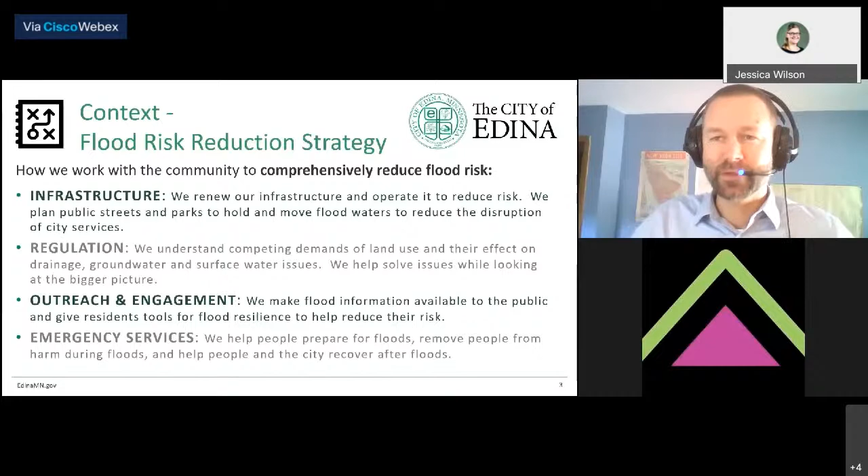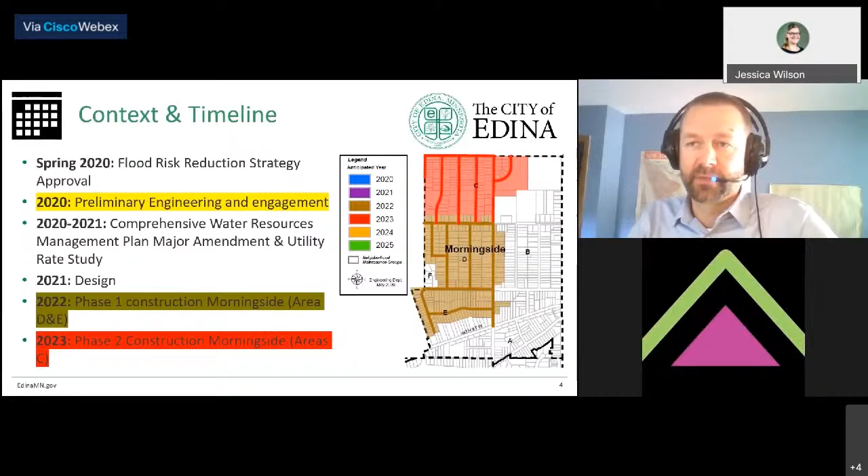This is the timeline that we've shared on the Better Together site. A lot of that conversation is happening there, and we're inviting you to come out and test the options that we're looking at, test all the components to the options. Tell us where you see opportunities, where you see risk, and what trade-offs you're willing to make in the community. This is that joint decision.

We're focusing right now on that fall 2020. We just gave a project update to the city council, and now we're bringing out some of these concepts to the public. This will inform our design work going forward, and it will help us narrow in on a project recommendation.

So if you haven't, make sure you're taking a look at that Better Together site. A lot of the conversation and the things that we're going to be telling you about tonight are really going to be expanded in more detail, and the conversation will be ongoing for the next several months.

And Ross, if I can just jump in for a second, I would encourage everyone. I know we're streaming right now on the site, so you should be there now. If you're on YouTube, then please feel free to visit. But it's a great place where we're putting all of the information, all of the work that we've done to date lives here. It's a great way to get in touch with the project team, so specifically who's working on it, and they'll get back to you, especially if you have a question about your specific property. There's also some videos, some surveys, some really good ways to engage with the project and connect with the people doing the work. So bookmark that.

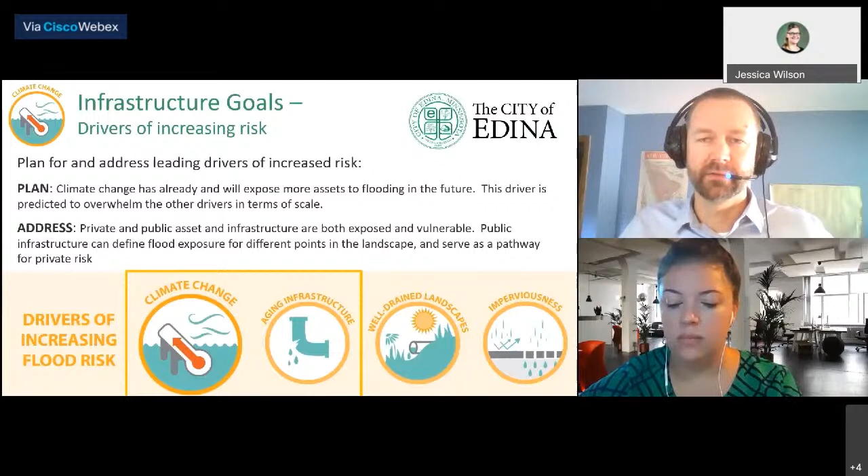During our task force, we saw there were three key ways that a structure is susceptible to flood risk. And the one that we've been focusing on for a long time is surface water flooding. We've had maps now for half a dozen years that show where the flood risk is in the neighborhood. But then we got a little bit more in detail. We know now that our sanitary sewer system can serve as a conduit between properties and between the public system. If that system is overwhelmed, or if a neighboring house floods, the potential for backflow to a nearby house goes up.

The other one that we've seen in the recent time is groundwater. Long-term climate trends and wet years on wet years can really raise the groundwater elevation to something that we haven't seen before. And an individual property's ability to withstand that rising water is important as well. We know that our public project is primarily focused on that surface water component, but we're also going to be including some of the improvements on the sanitary system to help as well. Groundwater, we don't see a feasible way to manage, and that's generally going to be the responsibility of individual homeowners.

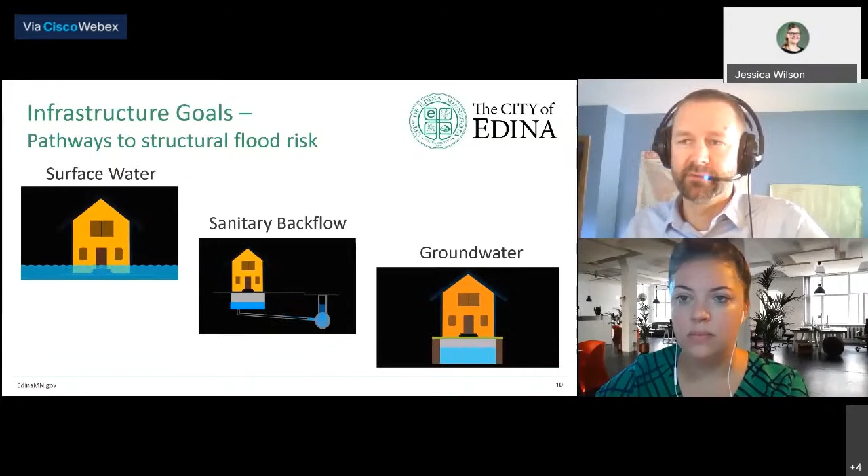So let's dig into the opportunity and the risk key issue areas. We've done a lot to model this neighborhood and to understand where the water pools and where the water flows. We've used a lot of new information, and we've actually taken neighborhood-specific flow monitoring to calibrate our models. And we've created a 2D model which can show the flow in a dynamic way. And while the maps I'm going to show tonight are static maps, we also have videos posted, and I'll give you a link to that so that you can see the dynamic model runs to really visualize how the flow times over the course of an event.

We like to say that this is the best neighborhood scale flood map in the state. We're really proud of it. We're excited for the opportunities it gives us to understand the problem and to engineer ways that we can mitigate and transfer those risks.

But it's still using assumptions for individual lots. So while we're showing individual lots and homes, and we feel it's good at that neighborhood scale, your lot could be off by a matter of feet. And where we don't show a risk, you might have one. Or where we show a risk on your property, it might not exist. If we get more specific information in the future, we can improve that lot by lot scale.

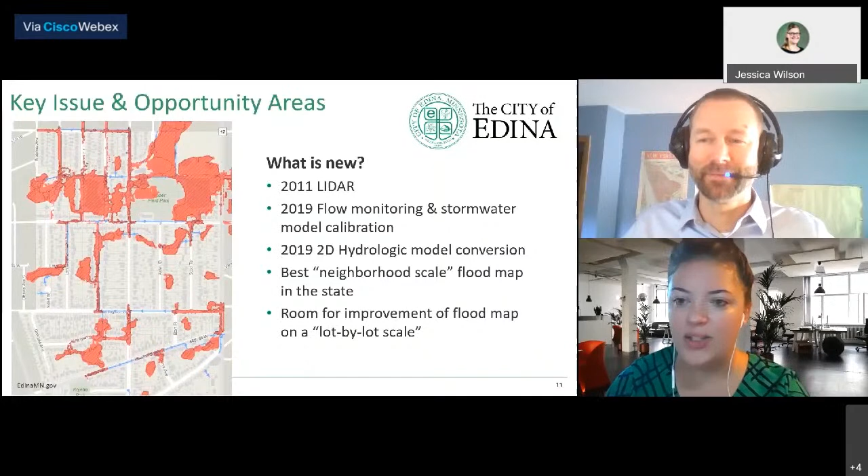Yeah, thanks. So we've learned a lot about what's possible here. The extent of the surface overflows, we were blind to those issues in the past. So this is new for us. We have a deep appreciation of the scale and interconnectedness of the problem. We know that we can try to really squeeze down on one area, but then the balloon pops up in another. We're getting a good feel for the interrelatedness of this issue across the neighborhood.

Being high means being dry. There's no substitute for that elevation, and in a low area, the opportunity for creating new areas for storage to reduce flood exposure to homes is really narrow. And sometimes the pipe systems can carry some, but they are limited because of their flat grades and because of just the physical space we have to work with. And the value of those overland overflows is high.

So as we orient you to some of these issues, we're going to work our way upstream. We're going to start in Weber Park. Then we're going to go to the low areas between Monterey and Grimes. We're going to look at some of the steep flow paths on Crocker, Grimes, and then up into some landlocked areas on Branson. Now there's areas outside of these specific areas that also have flood risk.

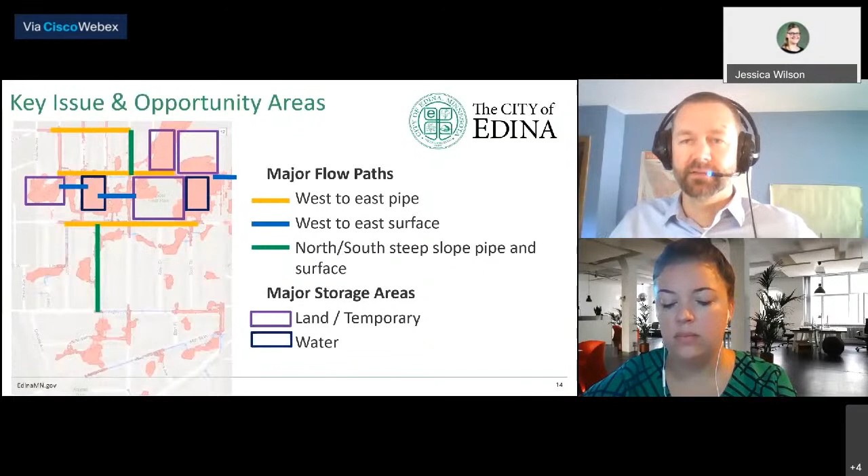We've got some major west to east pipes and surface conveyances. We've got some steep north-south flow paths based on the topography out there. We've got some existing storage in water and existing storage on land. So we're going to step through some of these areas downstream to upstream now.

The flood risk that we see in Weber along 42nd Street and along France Avenue, where Weber Pond is essentially spilling over its banks and into private property. Avail Academy has some flood risk because it's down in the low area. And some of the areas south of 40th Street essentially see overflow through our pipe systems from Weber Pond. Weber Park itself, near the skating rinks and the structure, sees flooding, and we see surface overflows actually flow through Avail from Grimes Avenue east to Weber Pond.

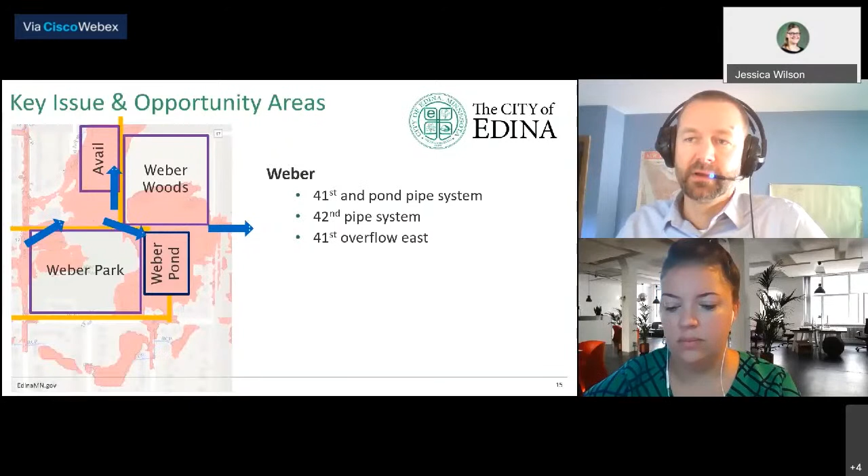And this is our 100-year event, and this is a very significant event. This isn't something that we see on a frequent basis, but this is maybe something that we would have seen during the 87 storm event, depending on what land use was there at the time. Ross, when you mentioned a 100-year event, what kind of rain totals are you talking about, and what time period? Yeah, we're talking about a 24-hour event that's about 7.5 inches of rain over that 24 hours. It comes really intense during the peak, 5 minutes or 30 minutes, but over the course of the day, it

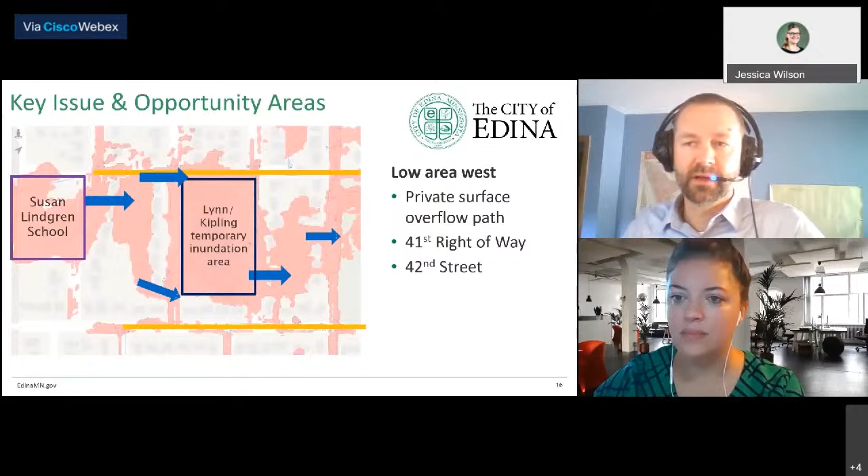where water would either pool or flow so deeply in the street that it could jump over a driveway, or it could jump over a low area and down into private property. So this is something that we definitely want to understand so that we can address it when we're designing those streets for flow.

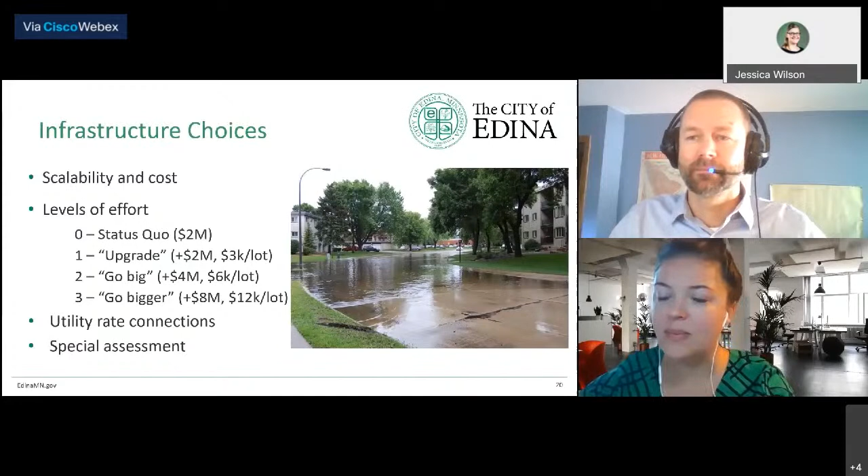So now, as we step through these infrastructure choices, we're going to look at it on a component by component basis, and then we'll show you what we put together for the combined option.

Focusing on the individual strategy, we've got storage and then flow paths. So storage is where the water can pool, and the idea is to make those bigger to find more room so that we can lower the flood elevations in those storage areas. The flow paths, we talked about some of the surface overflows already, but the pipes underground as well. We look at making those larger so that they can convey more water.

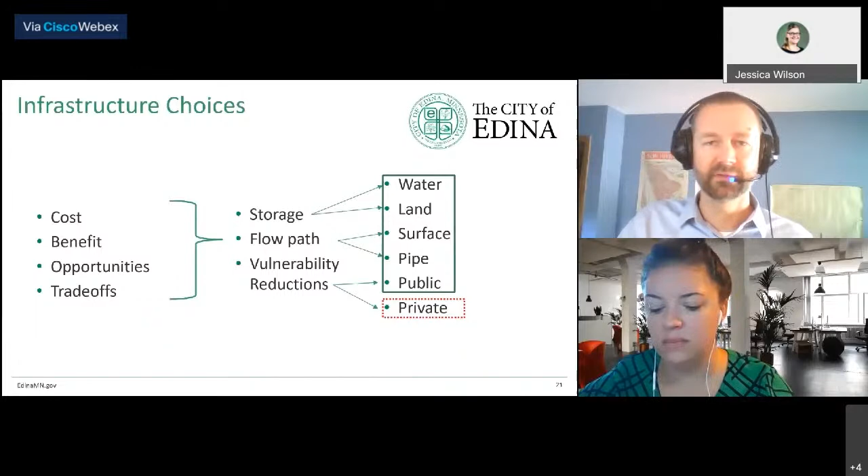And then the individual vulnerability reductions. What can we do when we can't engineer the water to go lower? How do we make sure that the structures and infrastructure systems can actually stand up to the flow or the amount of water or holding water? So for storage, we're going to be looking at land, existing water and land options. For flow paths, we're looking at pipes and surface flows. And then for vulnerability reductions, both public systems and private systems. And we'll talk a little bit about some of the costs, benefits, opportunities, and trade-offs of each.

So starting with existing water options. We have existing opportunities at Weber Park, at Weber Pond, and at the Lynn and Kipling inundation area. The idea here is we tested it in our model. Can we make those bigger? Can we expand them? And the figure on the right shows some of the options that we can work through when we have existing water. So expanding a pond, potentially lowering the outlet elevation so that it holds more water further down in the landscape. Maybe even predictively pumping it out before an event to make room for floodwaters.

Or if we can't hold it below the elevation of homes, can we intercept it and create some sort of a flood wall? So generally, the in-water options have low relative costs, but pretty high for flood walls. We see good flood benefit for these options, but the trade-offs are significant. It includes the loss of land if you have a park nearby, if you have existing trees on the area, and if you're behind one of those walls, you can lose the view. Opportunities, you could see improved habitats, or it could be part of a greater park development.

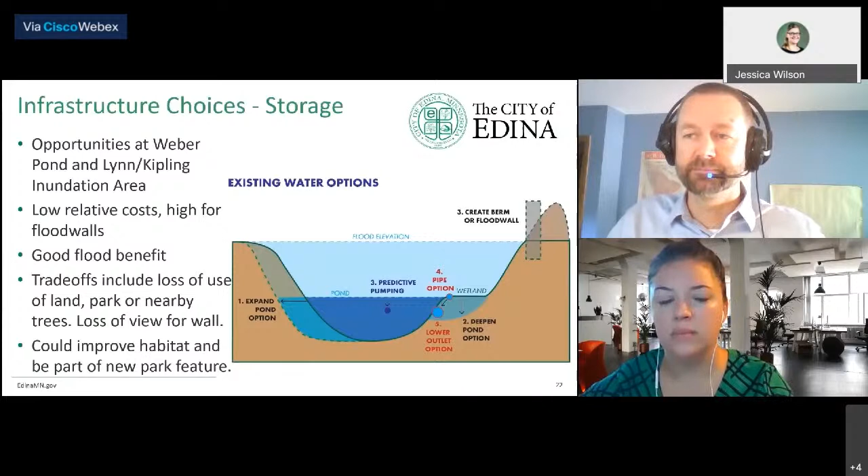We have some examples of what the flood walls might look like. And we figure we're going to have to show better what this would actually look like. So this is going to be part of the design team's mission over the next month, is to give you examples of what this might look like. Flood walls being one, but then, where would we put the water? What would it look like? I mean, we know what ponds look like, but what can they look like in their revised configuration?

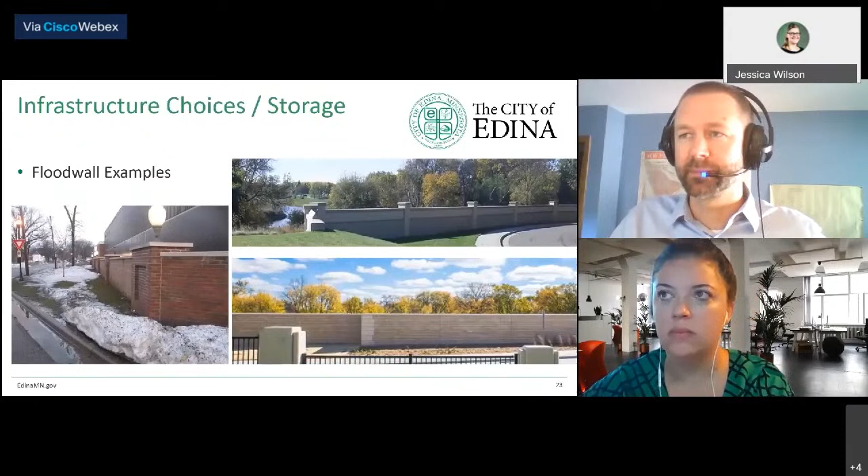Now we'll move on to land storage. We know we have opportunities here at Weber Park, the new Weber Woods, and then Susan Lindgren School and Avail Academy both have land area in these lowers. Generally, our options here on the figure that we show is, if you have some existing storage on land, you can lower that land and expand the area for storage, or you could just wholesale create a pond to get down to that water elevation and provide the most storage. The flood wall example we won't go over again, but that's an option in these land areas as well.

The costs are medium relative to the grading, and again, the costs are high for flood walls. Here we see another good flood benefit. These are some of our best opportunities for storing flood water. But again, they come with significant trade-offs. You lock up that land, you have potentially trade-offs to the existing uses like the sports fields, and it's going to limit the use of that land. You can't put a structure there in the future. It's going to be harder to reconfigure it if you have a dream for a different use.

So Russ, here's an example. Oh, okay. When you're talking about building a pond, and I know there's a lot of design work and specifics to be sorted, so these are just sort of high-level concepts. Would that be something that would exist all the time and then would just fill up more during a flooding event? Or would it be kind of a hole in the ground that fills up when it rains?

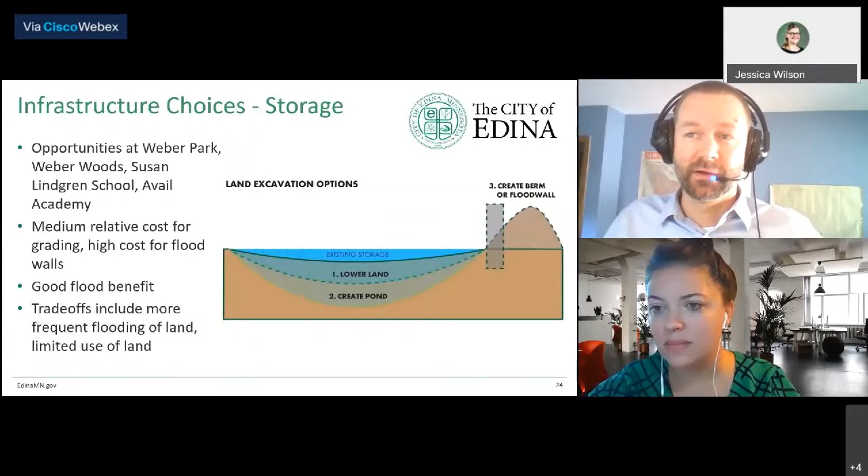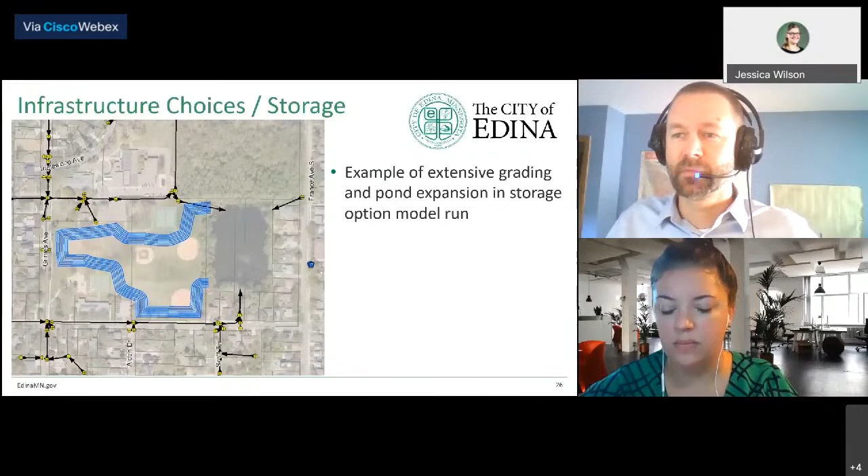Neighborhood wide, we expand that up into Weber Woods, significantly deepening the Lynn and Kipling inundation area, and even making some use on the Susan Lindgren site.

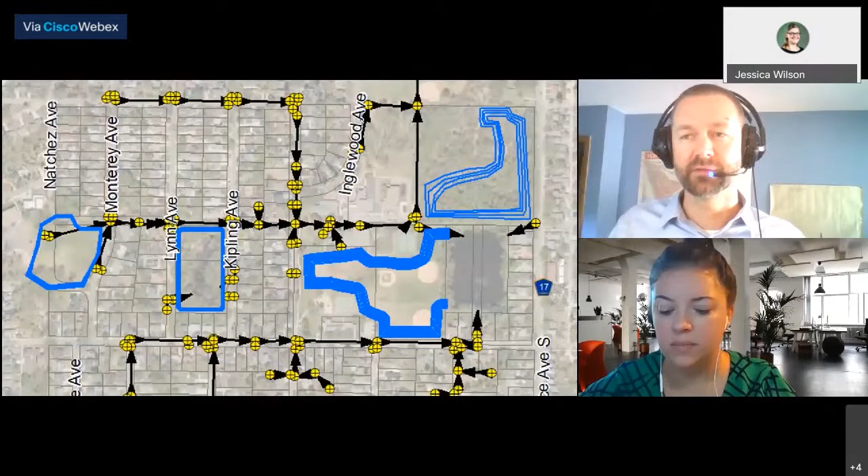Now we'll pivot again to the underground storage. So this is something that we have very limited use of in our model or in our combined option, but this is an alternative to some of those land lowering activities, and this is storage. So here we have another kind of cross-section cut that shows a park area, and then some sort of an underground pipe system that would be able to store water underground.

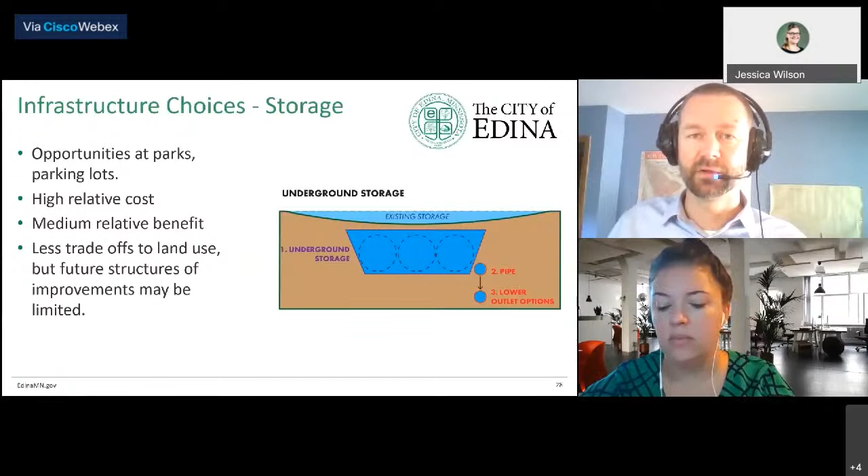The opportunity is at parks or parking lots. It has a very high relative cost and a medium relative benefit. You can't store quite as much under there because of the structures you need to put. The trade-offs mean you're still locking up that land, but you could still have relatively unimpacted active play on the surface. Here's an example from one of the firms that creates these precast structures, and then an installation of those.

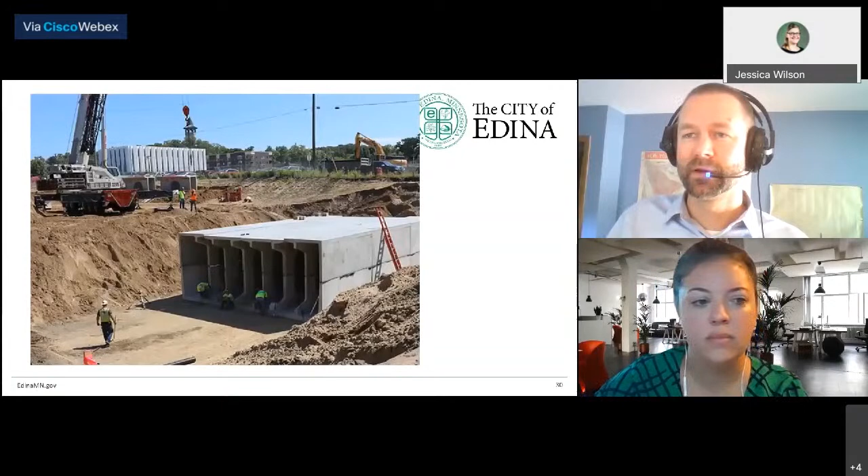And an example from Minneapolis' Prospect Park neighborhood, where they have underground storage and an above ground park where water can first fill up some land area and then cascade down into the underground structures. So this isn't in Prospect Park where this is built. The main idea is to hold the water underground, but it can rise above into this kind of rain garden-y park area. Yeah, here I think they split the difference in a little bit different way. They first put the water above ground to make it a feature, and then they start cascading it down, but it could be the opposite.

This is how two of those options might work together. Then it's a combination solution, or not a solution, but a way to move some of the water around. All right. And again, this is the design team's challenge, is to show what this might look like in our specific area. Right now, in our models we just start carving it up, but we don't have a good sense for the trade-offs and how it actually looks. But we'll get there.

Stormwater infrastructure. So this is the storage and flow paths. So we know that we can pool water on streets. The existing pipe system can be made bigger to carry more water. The benefits are good for transferring risk downstream. In some of our options, this can solve issues or really reduce flood risks and flood exposure in the upstream areas, but it comes at the cost of trading those risks and putting them downstream.

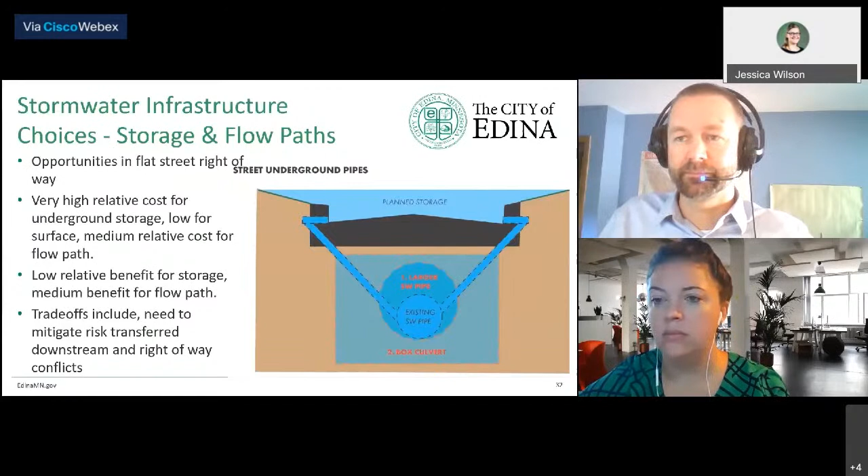A couple examples of what that looks like from our 58th Street project that's ongoing right now. On the left side, we've got some planned surface storage in streets, where during a big event, it pools there for a period of several hours, and then underground storage and infiltration on the right. There's not a lot of trade-offs to be made on the right, but those things come at a premium cost. So you get a lot less of it for your dollar.

Now on the flow paths, when we see those steep street areas, just like we can plan these areas for storage, we also have to plan them for flow. This isn't something that we've really done actively in our past projects, but we understand from seeing those new models and risks that it's something we're going to have to be planning for in the future.

So we have the opportunities here on the steep flow paths and areas with that bypass flow, or that overflow that I described. It's a low or medium relative cost for the flow paths, and it's got a good flood benefit. I mean, if we can prevent water bypassing into a private property, we can essentially remove the exposure from that flow path.

Trade-offs include lowering streets and the driveway impacts that are associated with that. You could go from a very shallow driveway you play basketball on now to something steeper if our street dropped a couple feet. And the associated utility impacts from that, if we really have to drop the street in an area, can be significant.

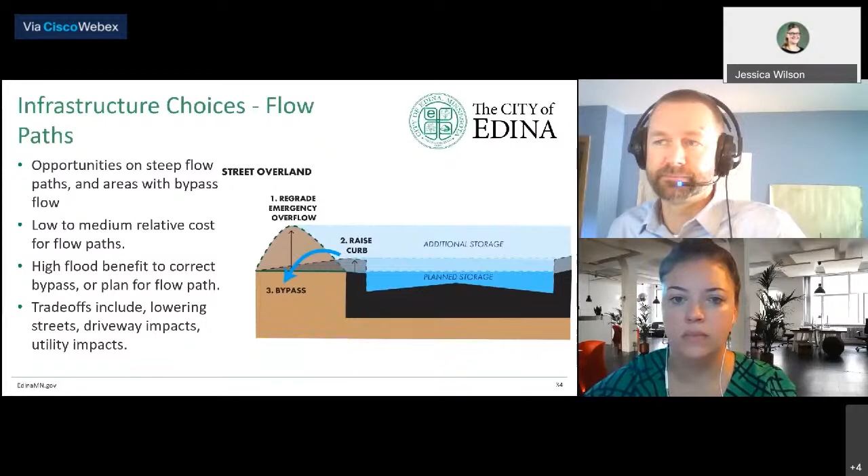The last one is the vulnerability reductions. So your system can serve as a conduit for flood risk among homes. If you feel like you might be high and dry now, but your neighbor isn't, you should probably be considering the risk of the sanitary sewer line backup.

In our public system, we're going to be making investments to line the sanitary sewers, to rehab the manholes or to replace them, to flood-proof or relocate lift stations, and to armor some of those high flow paths in the streets. That'll make the public infrastructure a lot more resilient so that it can resist those flood forces and have less effect to the nearby private properties.

But even if we did everything and we had a perfect sanitary sewer system, it still would have the risk of backup. And that's because of all of the private service connections and all the basements that are connected to these. So individuals can take vulnerability reducing measures, such as lining their own sewer service, preventing backflow from the line with a backflow preventer, or raising their sanitary sewer in their basement with an overhead sanitary sewer service.

We've got an example, and we go into a lot of detail on fact sheets at edinamn.gov/flooding, and those are things that people can start looking at and planning for right now if they see risk on their property. Some of these come with significant costs to both public and private, but they really do have good benefit. And the trade-offs are both the costs and the construction impacts.

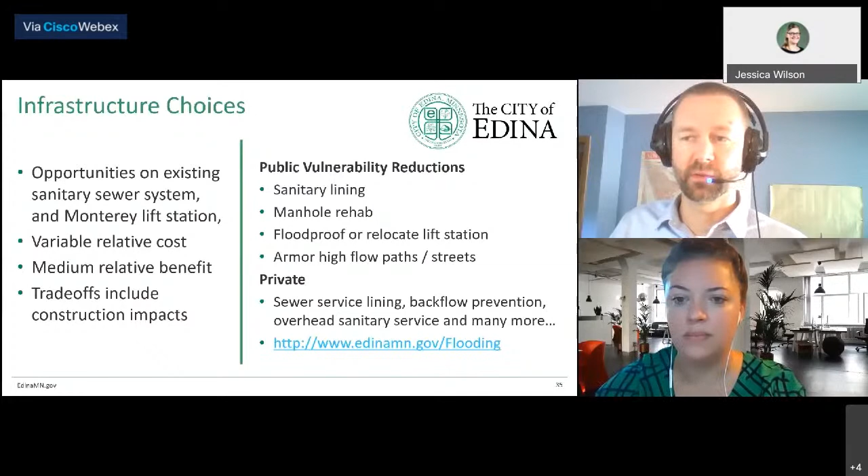All right, so now we've looked at several components of the options that we're considering. We've talked about some of the trade-offs. We just wanted to ground you again in our stick figure diagram. And then this is going to lead into an example of some of the model runs in the existing versus proposed benefits that we're going to be seeing from some of these potential solutions.

So in our combined option, first we modeled a bunch of storage that did pretty good for the low areas. We modeled a bunch of bigger pipes that did some good for some of the high areas. But each one of those options either didn't solve the other or transferred more risks downstream and caused more issues downstream. So we tried to combine the additional storage and the additional larger pipes and more flow to balance that benefit around the neighborhood.

And we took full use of some of these low areas, which comes with significant impacts again. And those conversations about what impacts we're willing to see and which areas we see for the most opportunity are really what we're going to be trying to discuss with the neighborhood going forward in the next several months. And all the input that is coming in is going to help us provide a good base of decision to say, here's what the neighborhood could buy into, or here's what they can't, where they see value and where they don't.

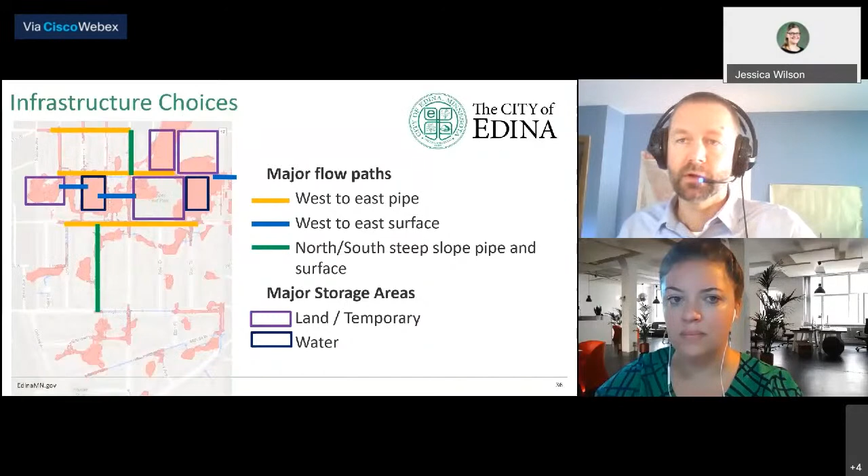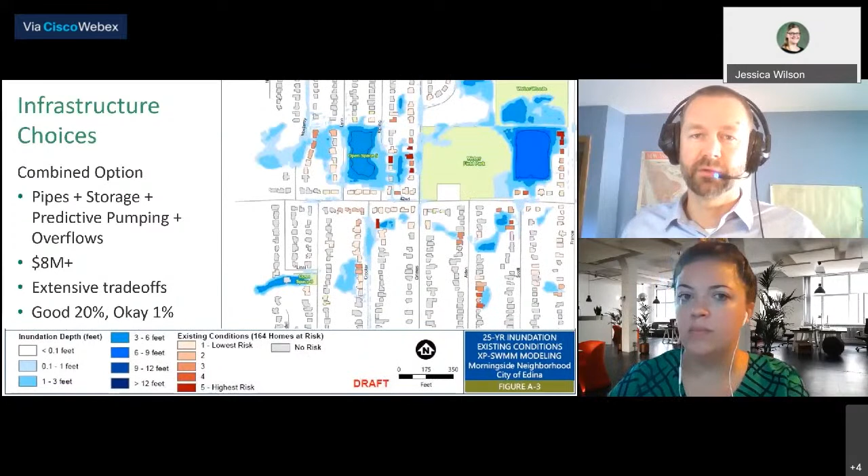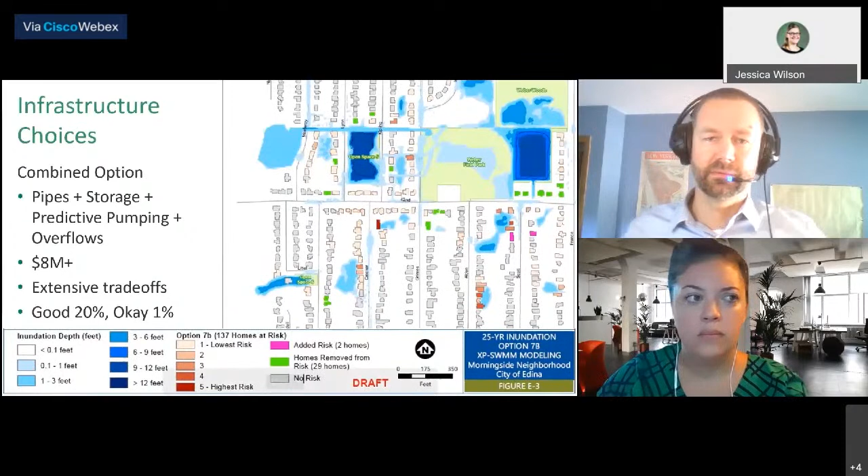So this gives a sense for a very large combined option with both pipes and storage. And we as engineers and technical folks are still learning how to optimize these options. But the one key ingredient we don't have right now is where the public is willing to make trade-offs and what trade-offs they're willing to make. And that's the conversation we're hoping to get going. So we'll kind of conclude this review of at least one of the options and one of the storms and all the components. And maybe, Patty, we'll be moving on to live Q&A.

Thanks. That was some really good information. It sounds like it's a complicated problem, but you guys have done a lot of work and research to come up with what you think the best proposals for the most impact and the most responsible cost are. So with that information, the next steps for us will be to take that out in the community, get some feedback from you out in public spaces or online.

You can definitely contact the project team on the Better Together site. And especially if you have questions about your individual property or want to get somebody from this project team to speak with you or come out to your property, those are things I believe that you're offering, correct, Ross? That's right. We want to hear your stories, right? And we want to know how it impacts you specifically, because it is a computer model, and we want to know the human impacts of that work. So continue to engage with us that way. There'll be more to come.